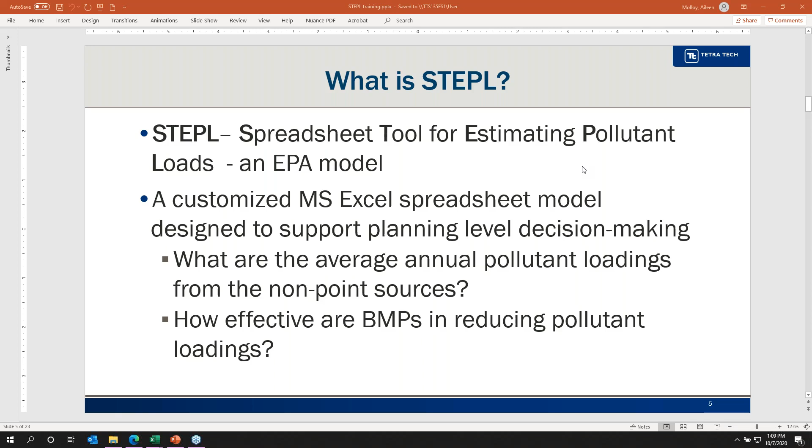STEPL calculates nutrient and sediment loads by land use type, by watershed, and calculates load reductions from BMPs based on efficiency values. STEPL was designed to be easy to use and comes with a significant number of default parameter values to make its use simple. If a user has information to substitute for the default values, this can be done without any additional programming knowledge.

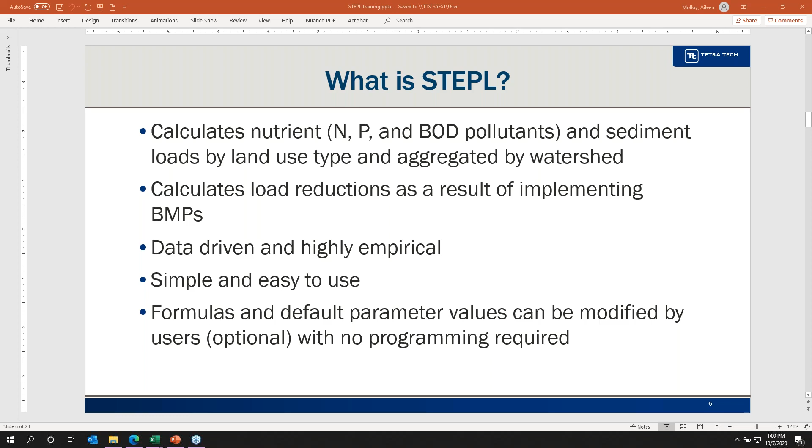So STEPL was originally developed to assist state non-point source project managers report their load reductions from local water quality improvement projects to EPA. This data was entered into EPA's Grants Reporting and Tracking System, also known as GRTS. And while it's still used for this purpose, STEPL is also used by other federal, state, and local partners, consultants, researchers, etc. STEPL is best used as a non-point source project planning and results estimation tool.

So we're going to go into some of the overview information about STEPL, and then we'll step through each of the input and output worksheets. But at a very basic level, STEPL offers loading calculations by source, provides BMP efficiency calculations to reflect load reductions, and has a data server to obtain watershed data in the absence of other locally available data.

In addition, STEPL also allows the user to select a suite of BMPs to apply to the watershed and modify existing BMP efficiency values if necessary. STEPL provides a tool for calculating urban stormwater BMP load reductions and a tool to calculate the combined BMP efficiency of multiple practices applied to a single drainage area.

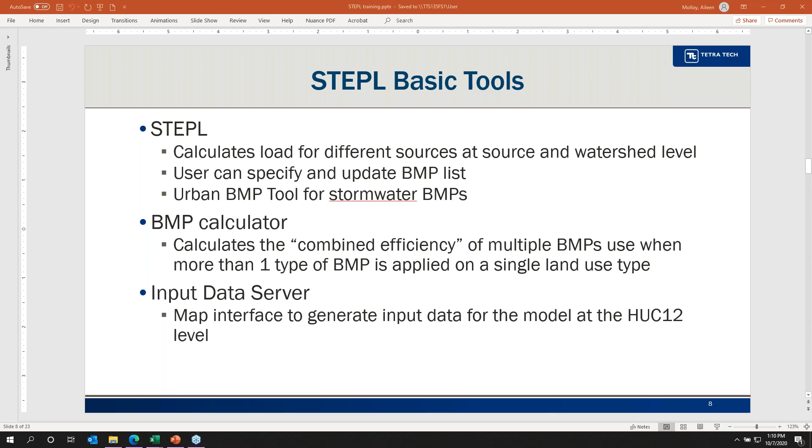So the inputs to STEPL can range from simple to complex, but at a minimum, STEPL requires land use information and the selection of a weather station to pull in precipitation data. If applicable to the watershed of interest, animal population counts and septic system information can also be included. The type and number of BMPs must also be entered to calculate any load reductions.

STEPL automatically provides default soil information and runoff curve numbers based on user-provided information, but these can be updated by the user with more specific information if desired. STEPL will also automatically subdivide the urban land use acreage into preset proportions of urban land uses, such as residential, industrial, and institutional. However, these distributions can be adjusted by the user to better reflect any actual urban land use distribution in your project area. And nutrient concentrations in runoff are also preset, but they can also be modified with more specific local data if you have it.

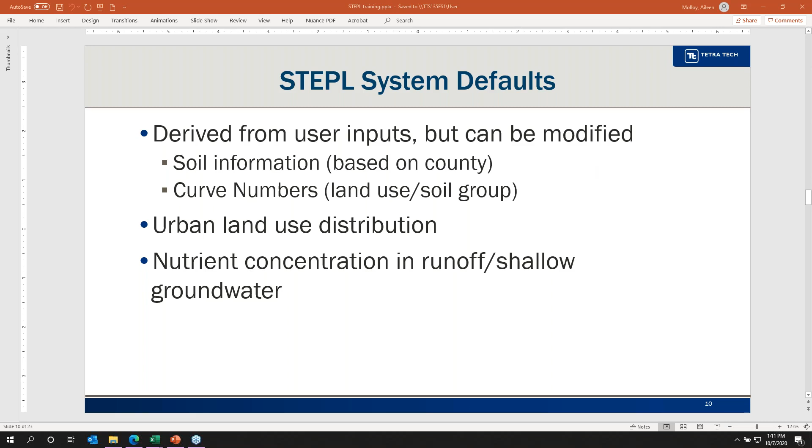So before we get into the demonstration, we just have a few notes on installation requirements. First of all, STEPL is only compatible with Windows 7 operating system or later, and Excel 2010 or later is preferred. And while STEPL will function on Windows 7 or Excel 2007, it does not work with the combination of the two. So if you're using Windows 7, you have to use Excel 2010 or later. STEPL also requires a significant amount of hard disk space and RAM, and you can see those requirements here, and check those against your computer.

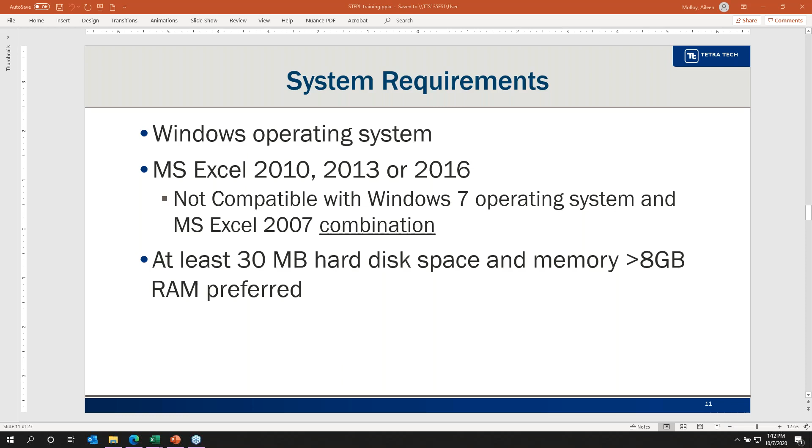So quickly, this is the STEPL website where the model and supporting documentation can be downloaded. Once you reach the home page, click on Model, Download, and Documentation to get to the download link. And we recommend using the 10 Watersheds template because it doesn't require installation of the program files and doesn't require administrative rights to open. We've also found this version to be more stable and compatible with a wider range of users' computer systems. For most users, this version is sufficient. It is a fully functioning version of STEPL that can accommodate up to 10 watersheds. If you need more than 10 watersheds, you can always use multiple versions of the spreadsheet and add up your total loads and load reductions at the end.

As the name implies, the spreadsheet model for 10 watersheds comes pre-populated with space for up to 10 watersheds, but also room for 100 gullies and stream banks. Also included on this page is the BMP calculator, which you will need to download if you're going to be creating complex BMP scenarios.

So also on the STEPL website is additional information and support, including access to various trainings and frequently asked questions. There's also our STEPL support email address that you can use to ask any questions if you're having technical difficulties or just want to know more about the details of STEPL's functions. This is the email address. It is monitored by both Tetra Tech and EPA.

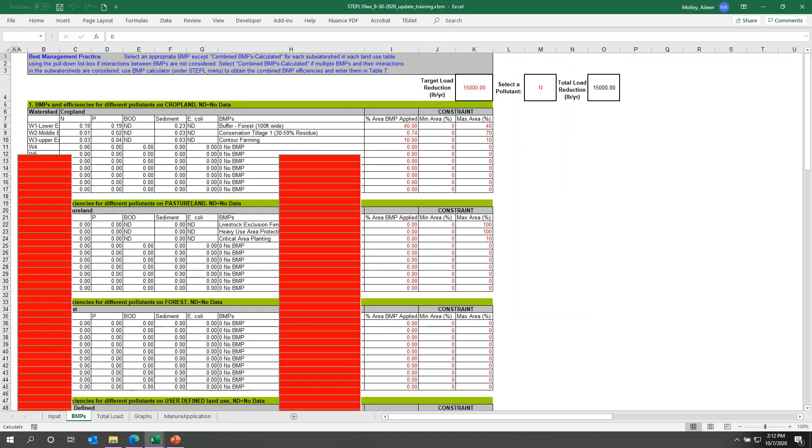Mustafa, you might be on mute. Sorry, yeah.

I do not know of any guide. I guess you would have to have your local stream restoration expert weigh in on that, or a field person out there. Aileen, do you have any thoughts on that? There is a narrative description here of stream erosion, but as far as the gullies, I don't think we have any specific data on that. It's kind of more qualitative, yeah. Yes, so there's some qualitative descriptions for the streams here, but not for the gullies, no. Okay. All right.

There are some questions about BMP use. Is it possible to analyze more than one type of BMP per watershed? I think we're going to get to that, but short answer for now: yes, we're about to talk about that. Okay. And then also, maybe foreshadowing, they want to know how you specify the areas that each BMP is applied to. I think we're going to get to that as well, correct? That's correct, yes. We'll specify an acreage, if that's what that question means. Sure. Yep.

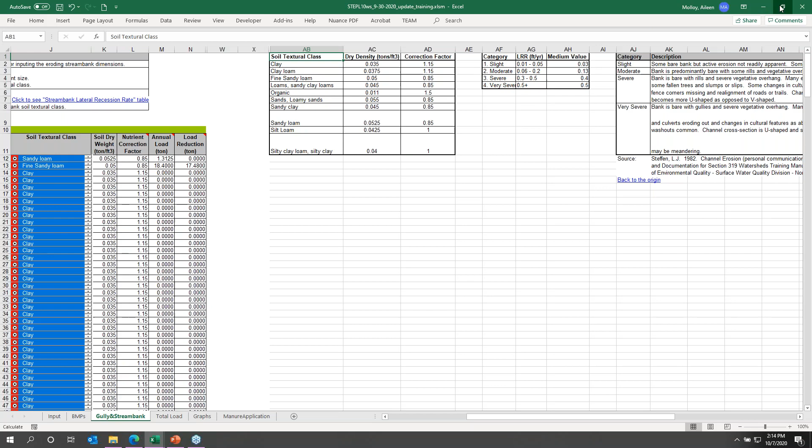Okay. All right. So I think we're ready to move on. All right. Okay, so those were some good lead-in questions. So what I want to do, bear with me because we have to show you multiple things at once here. So we're going to quickly pop back to our PowerPoint.

Okay. And so we just talked about how to represent one BMP on one land use, but now we're going to talk about BMPs in parallel and series configurations. This gets to multiple BMPs on the same land use. So I want to illustrate these different ways to represent BMPs. So it's important to know how the BMPs are placed in the watershed because the aggregate efficiency is going to be different depending on their placement.

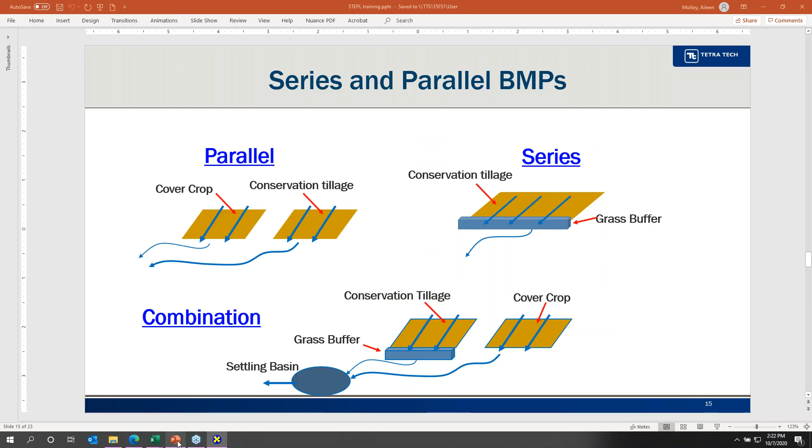So now we're going to walk through some examples using some illustrated watersheds. So bear with me while we look at multiple things at once. Okay, so here's an example of parallel BMPs only. Since this is cropland, you could also have done this exact same scenario over in the combined BMP efficiency calculator, but we're going to work through it here to show you how you could do it either way. This is one of the simplest examples, so it's easiest to start with a simple one.

So we're going to work in Middle Example Creek again, and we're going to say that this watershed has 3 BMPs, a forest riparian buffer, contour farming, and cover crops. And so each of these practices, as illustrated, is treating a separate area of the watershed.

So the BMP calculator provides boxes in which to build out your BMP configurations. So we're going to set up a box for each BMP by clicking the icon at the top, which is half white and half blue. I don't know how else to describe it, but if you hover over it, it says add a new BMP. So we're going to add a new box for each of our BMPs. We have 3, so we need 3 boxes. So then we double click on each box to open up the input fields and populate them with our watershed information.

So there's a BMP list where you want to make sure you pick the BMP from your correct land use. So we have forested riparian buffer on 25 acres. And you'll see the efficiencies appear here. And then you click OK. Then the next one, we have 250 acres of contour farming.

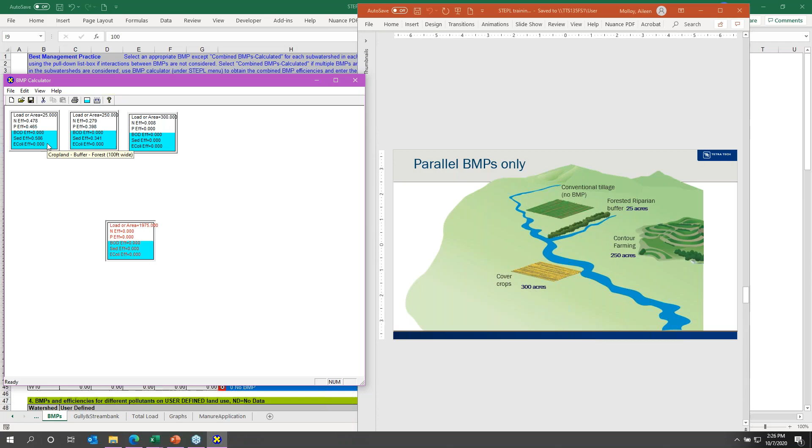So if your BMPs did happen to account for 100% of your acreage, you wouldn't need to add any acreage. This would just be a blank box that represents the watershed. So now we need to connect all of our BMPs to the watershed. So with your mouse, just left click on each BMP box and drag a line down to your watershed box, and they'll automatically snap to it.

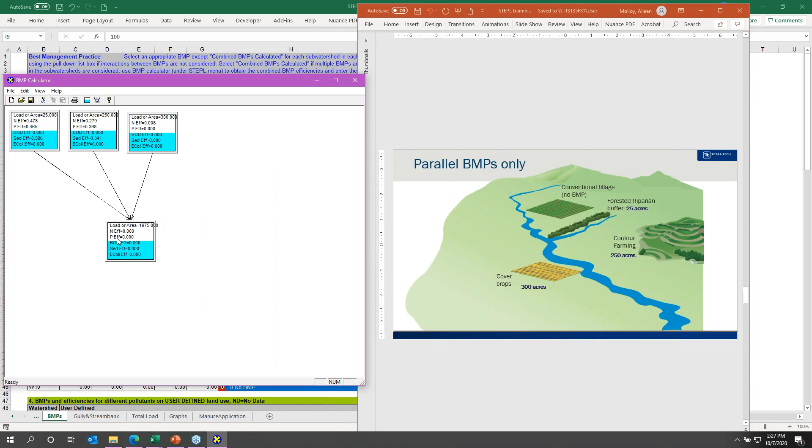And if you make a mistake and you've drawn a line to the wrong box or in the wrong direction from one box to another, just click on it and it turns red, and you can delete it and draw your line again. Same thing for the boxes. Click on them and you hit the delete key and it'll go away. You can also use the little scissor icon up here to delete a box.

So once the watershed is configured the way you like it, we're going to click on the Calculate Combined Efficiencies button at the top. It's this box with dots in it and 2 down arrows. And then as you can see, our total acreage check is here. So 2,550 is our total cropland acreage. And then here's the combined efficiencies for all of our cropland acres in this watershed.

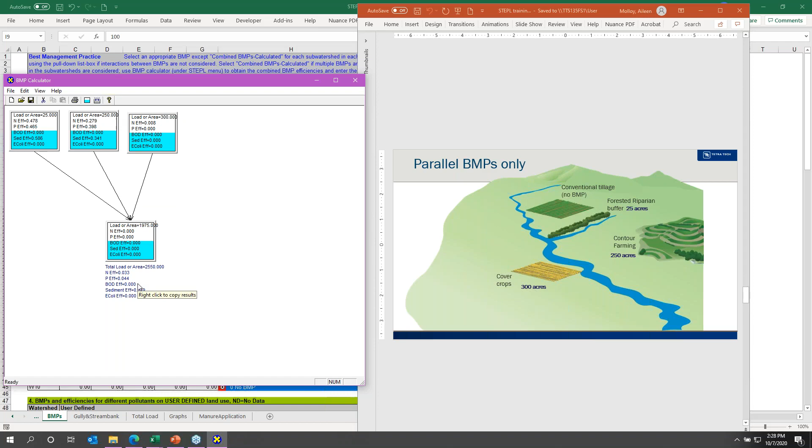Anytime you edit your scenario, make sure you hit this calculate the combined BMP efficiency icon again, so it'll recalculate and update, but it won't do it automatically. You have to click the button. So once we have our output, we can copy these values over into table 7 on our BMP worksheet. So let's move this over here.

And we're in the cropland for watershed 2 again. So shrink that down. And then we just enter our efficiencies. So we have 0.033, 0.044, and 0.039 combined BMP efficiencies. And then we can scroll up and the BMP efficiencies have been updated. And we can leave this at 100% because you've treated 100% of the watershed with the way you've configured your combined BMP.

So if you want to save this scenario so you have a record of it, just click Save, and you can name it whatever you want, and you'll be able to reload it by opening a file later. And you'll be able to take a look at your scenario in the future. Just remember, when you reload your scenario, you need to click the calculate combined efficiency again, so it will give you the values. Otherwise, it has a tendency to give you an area of 1 acre, which we know isn't right. So just make sure you recalculate it every time you use the scenario.

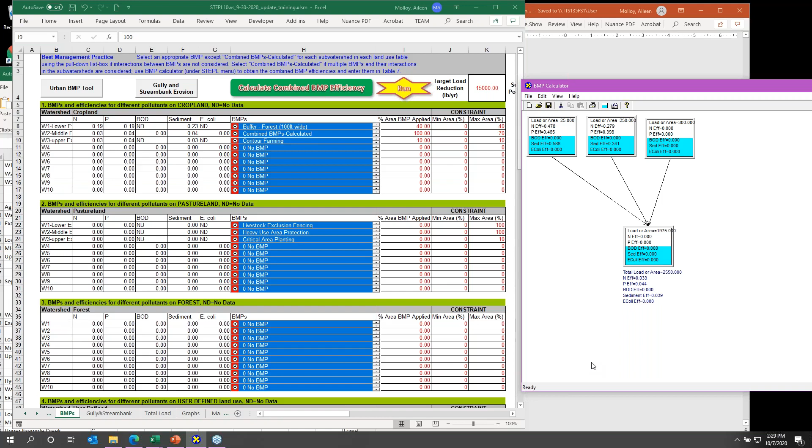So the next example we're going to work through is BMPs in series. So we'll get a new BMP calculator. And here's our simple BMPs in series example. So now we're going to work in pasture land in Middle Example Creek, and we have 525 acres of pasture in this watershed. So these acres are treated by 2 BMPs, livestock fencing and a forest riparian buffer. And these practices are arranged in a way that the runoff from the fenced pasture land also travels through this buffer.

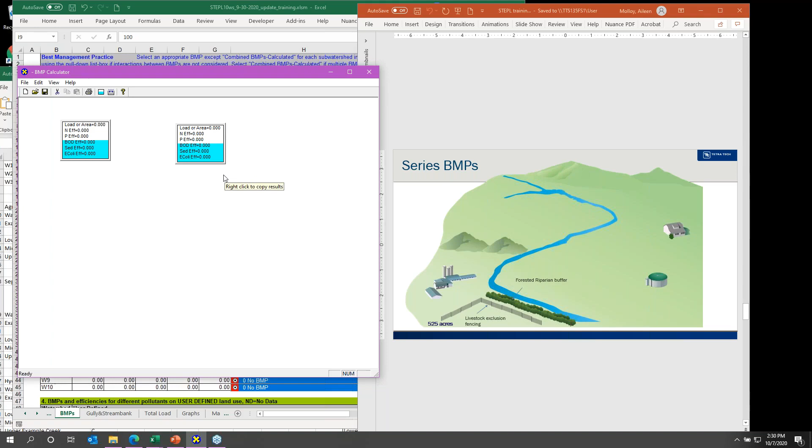So we're going to start out the same way by creating boxes. We have 2 BMPs, so we create 2 boxes. And the livestock fencing is the upstreammost BMP. You can do it in any order, but I just find it works best for me to work upstream to downstream just to keep everything kind of mentally straight. So we're in pasture land now, so we need to scroll down to the pasture BMPs. And we find our livestock exclusion fencing. And we put in 525 acres.

So now we're going to add the forest buffer. Again, make sure you pick the pasture land forest buffer, not the one from cropland. And now we're not going to add any acreage because this BMP is also treating the same 525 acres as our fencing is. So we just leave the acreage as 0. Click OK. And now we're going to connect a line between these two to indicate that the same acreage is being treated by both BMPs.

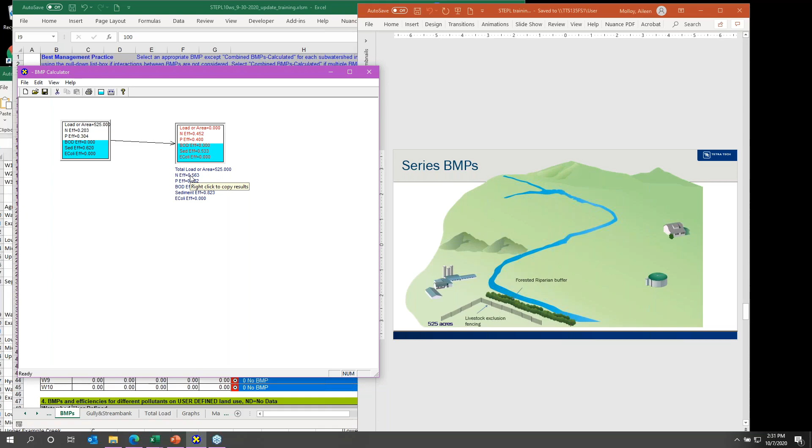So we draw a line from our livestock fencing over to our forest buffer. And then we click calculate. And there's our result. So 525 acres and a combined BMP efficiency that's higher than either of the practices individually. So the same thing would apply. We would come back over to table 7 with this value, and we're in pasture land, so we want to go to the pasture land column or row, and we would just enter our efficiencies here.

Aileen, make it bigger. Some of us can't see. The spreadsheet or the calculator? Just whatever screen that you happen to be highlighting. Okay. And just be aware that there are those of us like myself who suffer from severe eye strain. Okay. Thank you for being kind.

All right, so there we have our combined efficiency. And we come up to pasture land and we're in the middle watershed. So we'll go back and pick BMPs, combined BMPs calculated. And again, we're at 100% of the acreage, so we put 100 in the percent area applied. And that's your updated efficiency.

So now we're going to walk through an example of parallel and series BMPs. We're going to assume, let me rearrange things here. And if the BMP calculator is small, I don't think there's any zoom features on this. There's nothing I can do about that, so I apologize, but I'll try to keep the spreadsheet bigger.

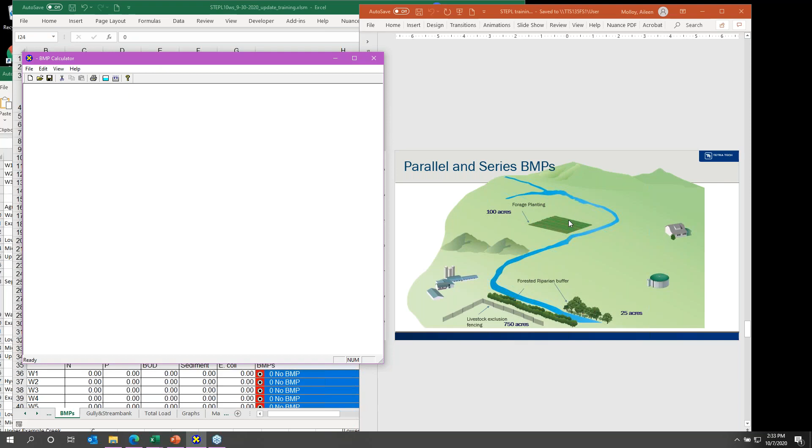So in this example, we'll start with a new calculator. We have 975 acres of pasture to work with. And we're going to assume that we have a similar configuration of livestock fencing and buffer down in the lower part here. And then in addition, we also have 100 acres of forage planting further upstream and 25 acres of riparian buffer on the other side of the stream. So if you add all of this up, it amounts to 875 acres. So we'll have to add another 100 untreated acres in this scenario as well. So let's start with our BMPs.

We'll add one for fencing and one for the buffer, and we can go ahead and do this one the same way we did before, where we pick fencing on 750 acres. And forest buffer on 0 acres. And we'll go ahead and connect those two right now. Then we can add our other BMPs. We have forage planting on 100 acres. And we have buffer on 25 acres.

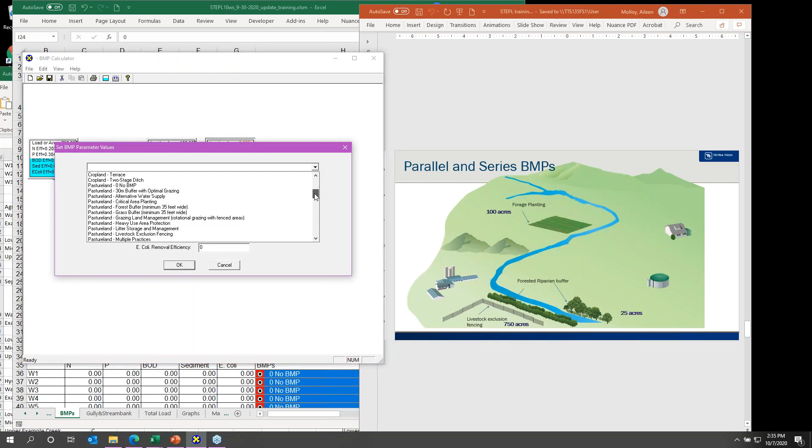And as I said, we also have 100 acres of untreated area. So we don't want a BMP, but we'll add 100 acres. Now we want to create another box to represent the entire watershed so we can tie all our practices together. So we're going to tie our series practices to the watershed, and then our parallel practices, and then our 100 acres that don't have any additional BMPs.

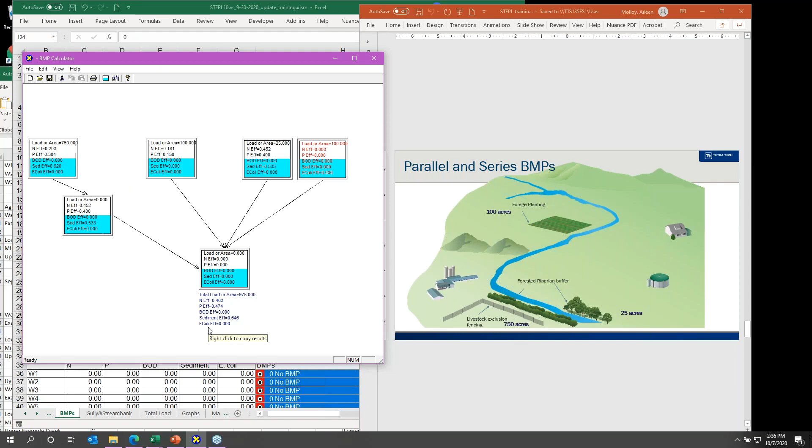And then we'll click run. And there's our 975 acres and our combined efficiencies. So this is entered in, I won't do it again, but we'll enter it in table 7, and then you pull it up in the appropriate section of table 2 as a combined BMP. I have one more example that's a little more complex. I think to save time, because we're running a little behind here, I'm just going to pull it up. I'll demonstrate what it looks like as an example.

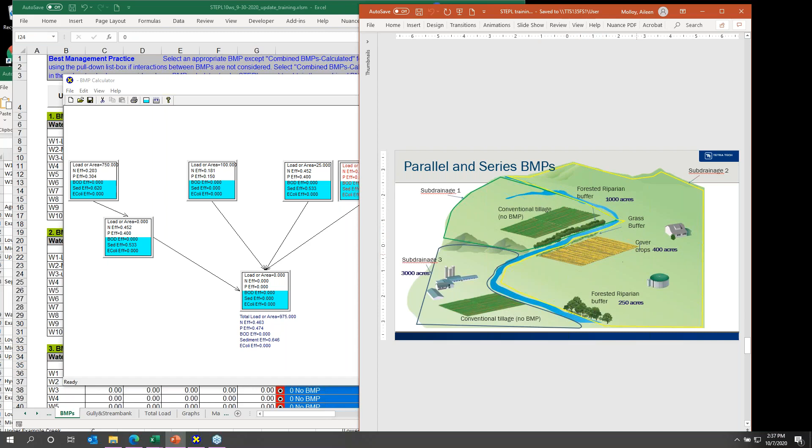So this is a more complex one where we have 3 sub-drainages, one without any BMPs, one with 1 BMP, and then a couple series in parallel in another segment. So what this looks like, I have a saved scenario. So I open it up and I find my saved BMP calculator scenario. And this is what it looks like. And here you can see an illustration of if you don't recalculate when you open it, it'll just show you 1 acre and no efficiency. So we're going to click calculate. And here's the total acreage that we have for this scenario and the efficiencies.

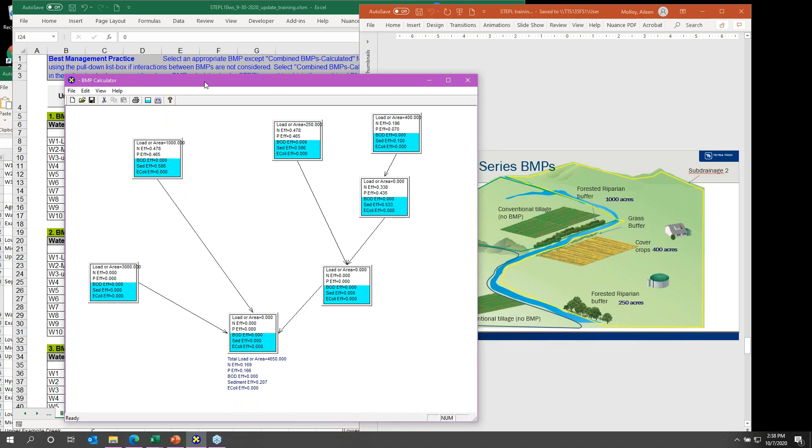Now in this scenario, this is the upper example creek, and we know that there are 12,750 acres of cropland in that watershed, but our BMP scenario only represents 4,650 acres of cropland. So we did not build a scenario that represents 100% of the cropland in that watershed. So what we can do to account for this is we want to make sure we enter our efficiencies in table 7. This is watershed 3 cropland, so we'll enter these here.

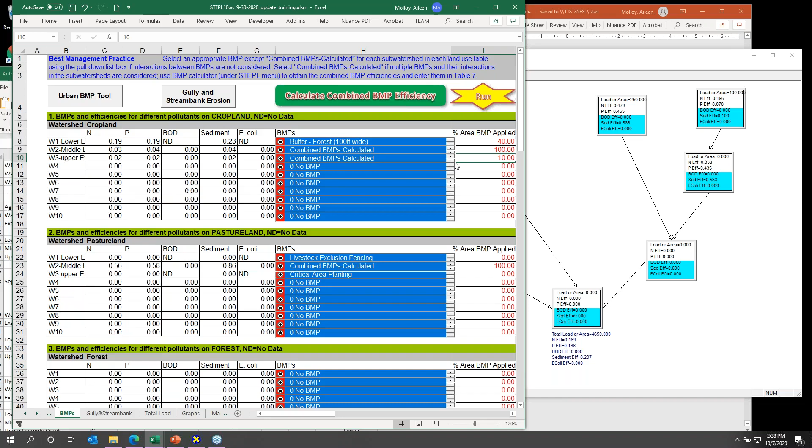And then we'll go up to cropland in watershed 3 and pick our combined BMP as calculated. And then when it comes time to decide for the area of the BMP applied, all we have to do is say 4,650 acres divided by the total 12,750 acres is about 36.47%. So our BMP applies to 36.47% of the cropland in the upper watershed. And you'll see that adjusts the efficiencies accordingly.

So we've done these examples with pasture and cropland, but the BMP calculator tool can be used with any land use that's in STEPL. That includes the forest and the urban. We'll go through an urban one in a little bit, but with that, let's just take a quick pause here and see if there are any questions about the calculator or combined or series BMPs.

Yeah, so Charles wants to know if you can add a large set of BMPs essentially as a single BMP if you've derived reduction efficiencies, and then basically add them as a batch instead of one by one. Can you talk about the wisdom of this idea, what sort of factors should be considered if considering this type of approach?

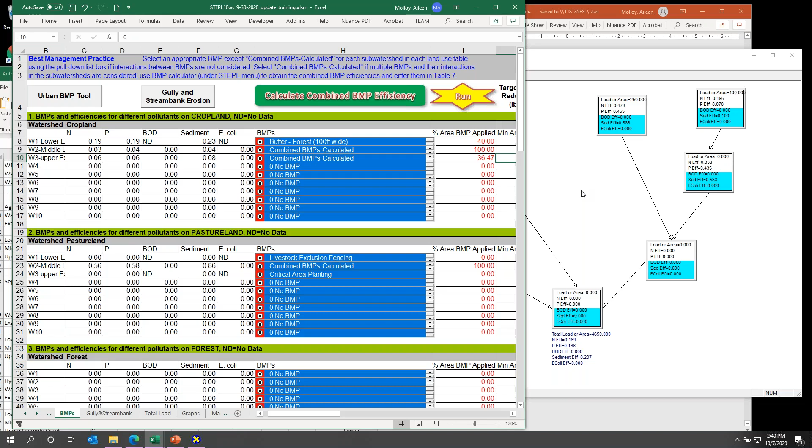So I think what that question is asking is if you already have an efficiency for a suite of BMPs that you're going to be using, you don't need to use these combined calculator efficiencies or the BMP calculator. You can go directly down to table 7 and enter your efficiencies here. Obviously, that relies on your efficiencies, not the default value efficiencies in STEPL. So you have to be confident in your efficiency values to do that. But there's no reason that you can't come directly here and enter a combined efficiency from something that you've calculated externally from STEPL.

Okay. Does that address the question? It did for me, hopefully to Charles too. Okay.

Yeah, so can you remind us, can you show us how we get to the BMP efficiency tool? The calculator? Yeah, the calculator. Yes. So I can't zoom in on the menus, unfortunately, but you go to add-ins at the top here. I know it's a little laggy, so I'll wait and make sure. And then over on the left, there should be a drop down for STEPL. So you click that. And then you go to BMP calculator. Right here.

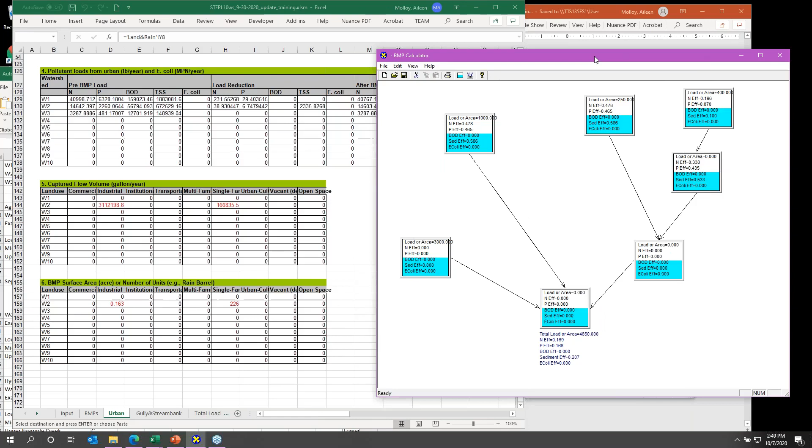All right, so here we have a 1.5 acre commercial parking lot that's been retrofit by replacing 1 acre of concrete with pervious pavers. The entire parking lot also has bioretention cells around the edges and in the medians. So we're going to create boxes to represent our pervious pavers and our bioretention. And we'll do an acre for the pervious pavement.

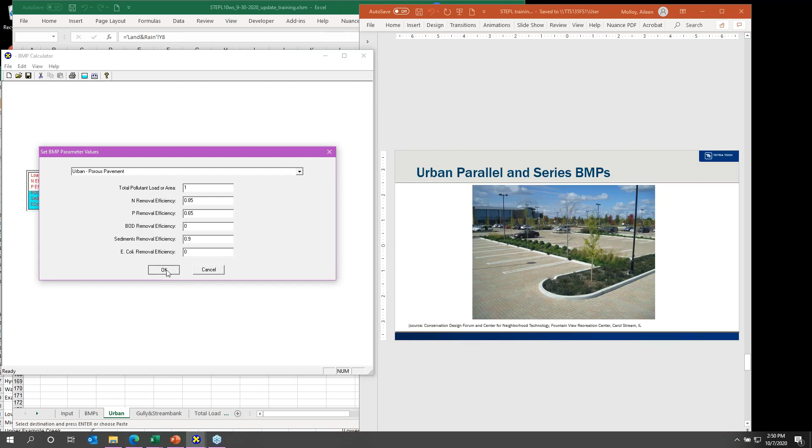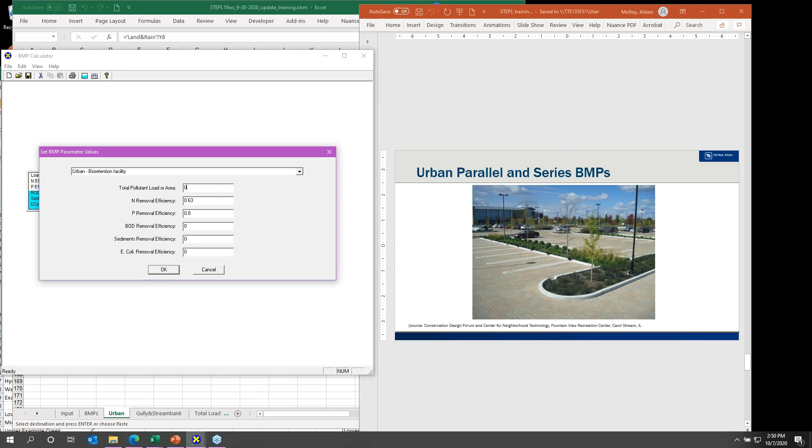And then for the bioretention, this is treating the acre of pervious pavement and an additional 1/2 acre that's not already being treated by the pervious pavement. So what we want to reflect here is the additional acreage not accounted for in the pervious pavement. So that's 1/2 an acre. Hit OK, and then we're going to tie the two together and hit run. And so this will reflect that there are 1.5 acres being treated in total by both practices.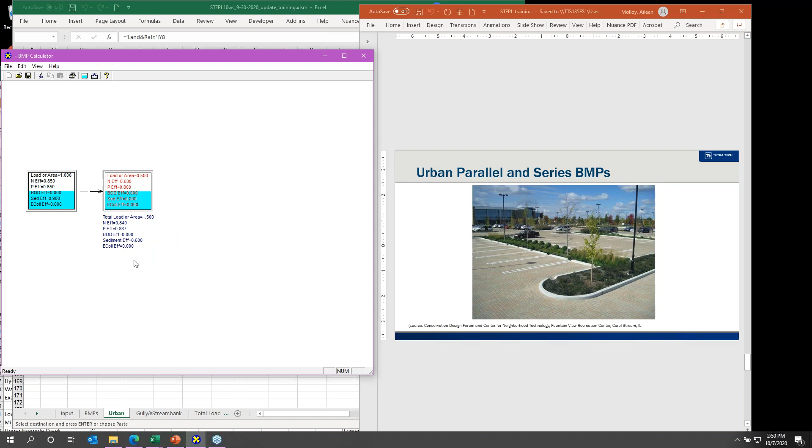And so we can take this and move back to our urban BMP tool, and we'll pick commercial land. Then we'll pick combined BMPs from our drop-down list. And we know it's 1.5 acres. And then here it's going to ask us for our removal efficiencies. So we'll need to get those from our BMP calculator.

So we'll just add them quickly. And hit OK. And there you go. So that BMP has been applied. And that's all there is to urban BMPs or creating a combined complex BMP scenario.

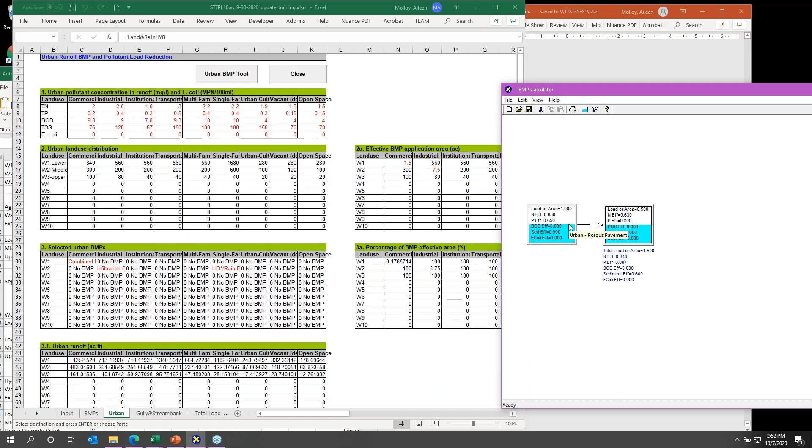We can either pause for questions here, or we can jump into the total load tab. Don, do you have an opinion? No, go ahead with the total load tab. Just keep going? Okay. All right, I will make it bigger.

All right, so at this point, all of your BMPs have been entered, all of your input data has been entered, and we can go to the total load tab where you'll get your results that summarize all of the loads across all the watersheds. Table 1 provides it in aggregate by watershed for your initial load without the BMPs. Then it provides in the purple area the reductions, and then it goes to the loads with the BMPs, and then it gives you a % reduction from your BMPs.

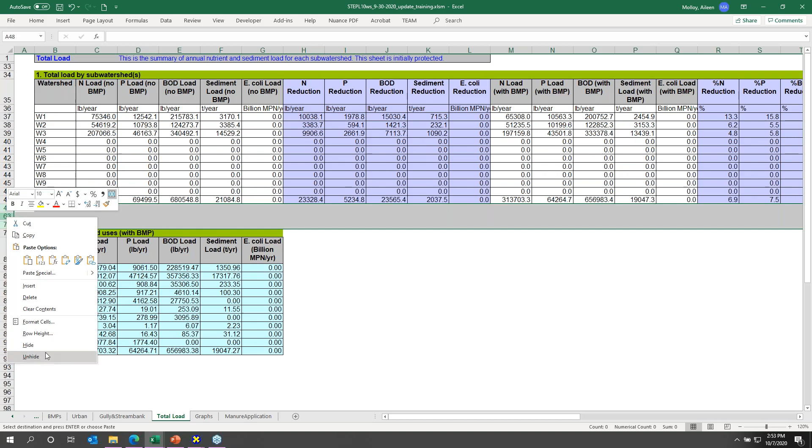Table 2 breaks out your land use loads with the BMPs by the different land uses, but it's in aggregate for the watersheds. So it's aggregated in a different way in each of these. If you need more specific information on a specific land use in a specific watershed, you can unhide the rows between these two tables and see the results for specific land uses in specific watersheds.

And then the final tab we have is the graphs. So this provides a visual display of the loading rates, the reductions, and any proportional contributions of loads by land use. This page is locked. You can unlock it by clicking on Review and then Unprotect Sheet, and that will allow you to manipulate these tables or copy and paste as you want.

However, there is another option. If we go back to the input tab, at the top here in row 10, there is an export data button. And this will produce a couple of options for you. It can provide you with the outputs only from these tables in the total load tab, or the outputs with the graphs, or inputs and outputs, or inputs and outputs with graphs. You can choose whatever you want.

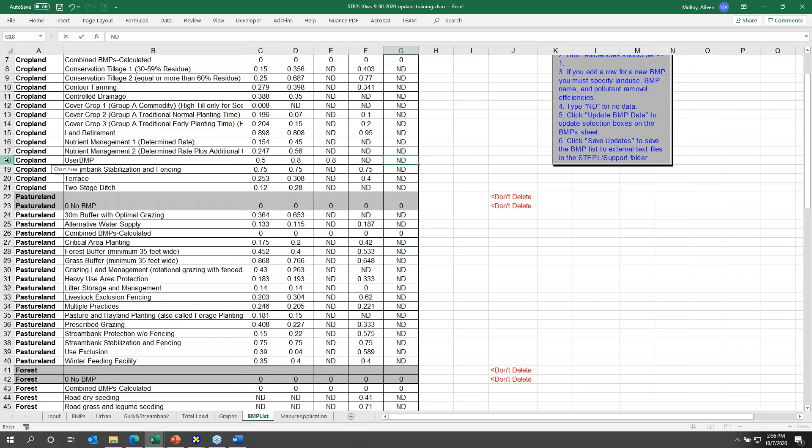And if you don't know an efficiency, you want to type ND for no data. Don't leave it blank. You have to type something there, otherwise it won't work. And then you click Update BMP Data, and that will add your BMP to all of the drop-down lists throughout STEPL. It's just processing through all the tables right now.

So just remember that efficiencies must always be less than or equal to 1, and you have to fill out all the pollutant fields and include the ND if you don't have any data. So as you can see, we just got a confirmation that it was successfully updated. Now, if you want to save your BMPs to use later, you can click Save Updates.

However, that is going to permanently overwrite all of the original efficiency values in this spreadsheet and future spreadsheets that you use from here. So you want to make sure, if you want to save the updates, that you don't really need the default values, that you're okay with permanently saving over them.

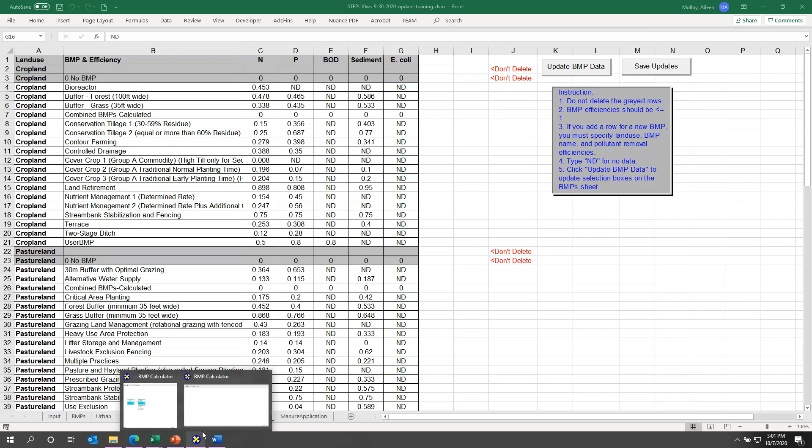So cloud-based computing. We're getting with the times. What can we say.